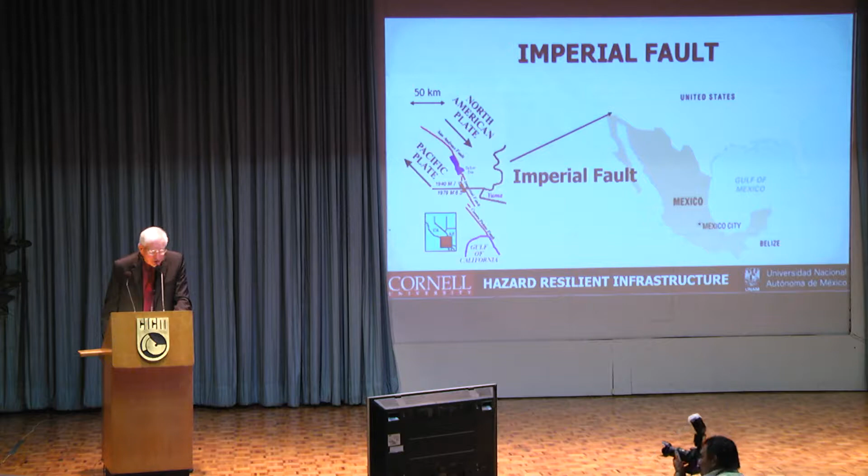Take one particular fault, the Imperial fault. If we look at the border between the United States and Mexico, the Imperial fault crosses that border as a kind of emblem of common cause. There was a 1979 Imperial Valley earthquake which caused damage on both sides of that border.

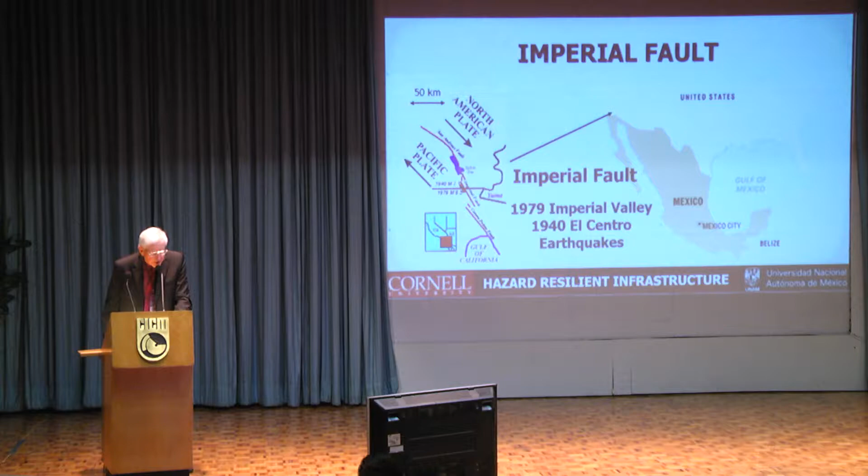Going back to 1940, the El Centro earthquake was another one that caused damage on both sides of the border. In fact, if we trace back year after year, there are a number of earthquakes just on that one fault.

We've had some terrible recent earthquakes in Mexico, and certainly those of us in the United States who also have to deal with earthquakes send our condolences and our affirmation to work with you to make our communities better in the face of earthquakes in the future.

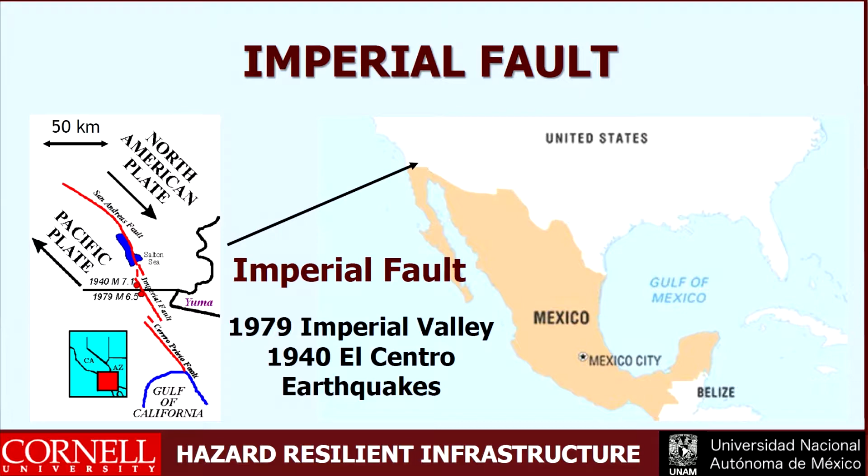One of the missions I'm on during this particular visit is to help coordinate a U.S. and Mexico joint evaluation and inspection and understanding of the effects of the two recent earthquakes: the September 7th earthquake near Chiapas and the 7.1 magnitude earthquake of September 19th.

Hurricanes also have a profound effect on both the United States and Mexico. Most recently, our problems have not been earthquake related, but through the recent hurricanes, Irma, Maria, and Harvey, we've had terrible destruction, loss of life, and problems there.

It harkens me back to the 2005 hurricane season when we had so many named storms that we ran out of the alphabet and had to go to the Greek alphabet to name them. I call that the Greek bailout of our alphabetic system.

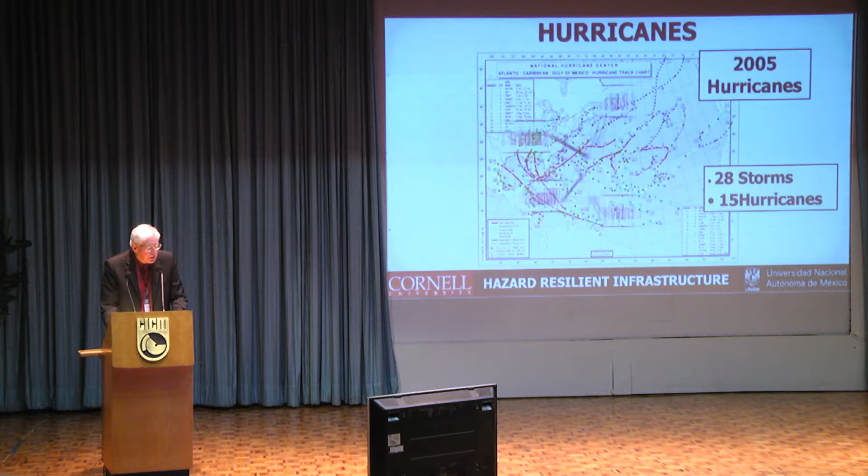Some of the more serious storms of that time were Katrina and Rita, which had a profound influence on New Orleans, the first one being the major effect, but also in Mexico, Hurricane Emily.

I'll tell you a personal story. We were going to take a vacation at a place near Playa del Carmen called Xpu-Ha. Xpu-Ha was destroyed by Hurricane Emily at the beginning of that hurricane season.

Then we decided to take a vacation at Cozumel, and then that was destroyed by Hurricane Wilma at the end of that hurricane season.

There's a tremendous story in the restoration of Cancun and the whole Maya Riviera, which was very effective after Hurricane Wilma. I've always wanted some common dialogue between our Mexican friends and colleagues and the United States friends and colleagues about how both those hurricanes were treated and attended to.

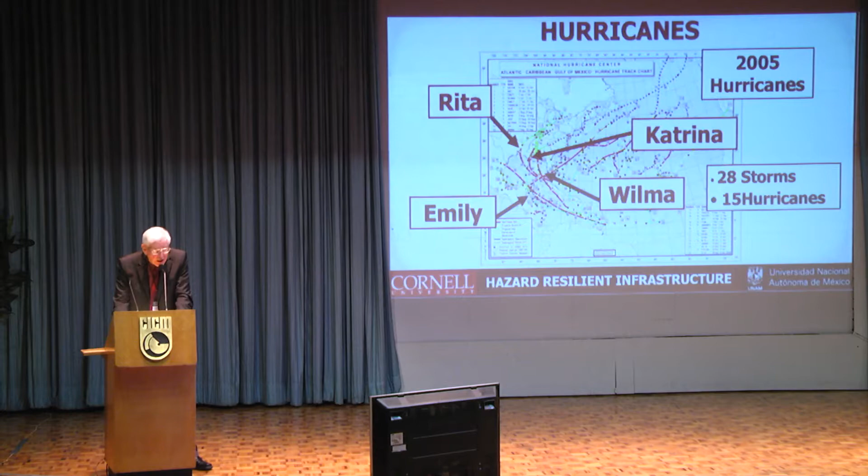Katrina in the United States and Wilma in Mexico, because both of them had profound influences, and of course they were terribly destructive. In fact, with Hurricane Katrina, we typically talk about an evolution in policy.

This created a revolution in policy, where after 9/11 we went from a code or approach adopted by the then Department of Homeland Security for the protection of critical infrastructure to the creation of resilient communities. We're still exploring that transition today.

So before we tell some stories about communities that have had to deal with natural hazards, particularly earthquakes, because that's very topical and important for borders, let's talk about some very important characteristics of infrastructure.

We like to look at infrastructure as being geographically distributed. That is, where do we get the resources and services that support all the buildings and all the activities we have in our communities? We get them from geographically distributed systems such as electric power, gas and liquid fuels, telecommunications, transportation, wastewater, water supply, and flood control and levees.

We understand that these systems are interdependent, so the solution is a collective one. We should not look at one of these systems out of context and individually, but in a united way, coming together to understand how they influence each other and how they can best be managed as a whole.

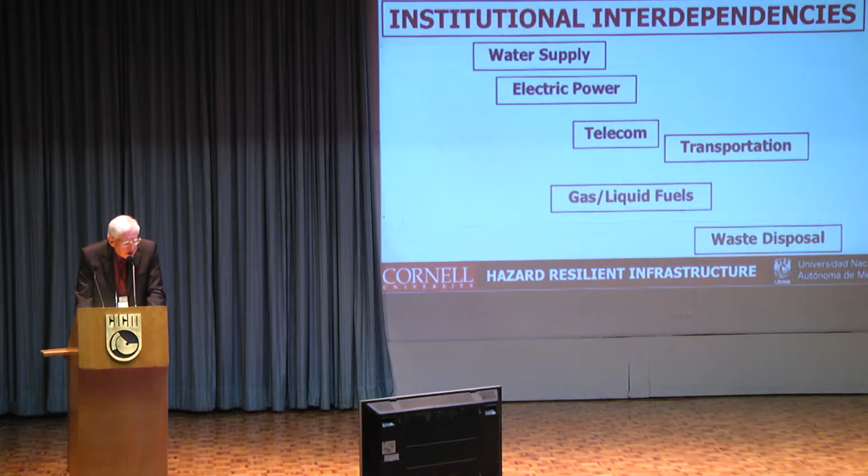If you lose the ability to pump water, you lose the ability to provide water for communities. You lose the ability to provide water for fire protection, and then you lose buildings. This goes on and on with respect to transportation and power and water, and it even affects our financial markets. Perhaps the most important interdependencies that exist in infrastructure.

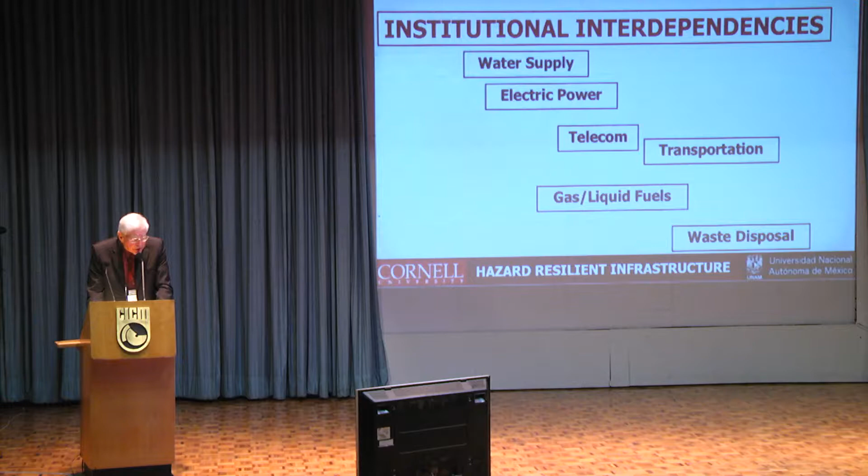If we look at these infrastructure systems I just identified as being shown on this screen, not necessarily connected with each other, but on the same screen, a good analogy for how they actually operate in reality would be Yugoslavia. Our infrastructure is balkanized. Water people do not necessarily talk to electric power people, who do not necessarily converse well with transportation people, who do not necessarily talk to telecommunications people, because they have different business formats. They have different cultures. Some of them are privately funded, some of them are publicly funded.

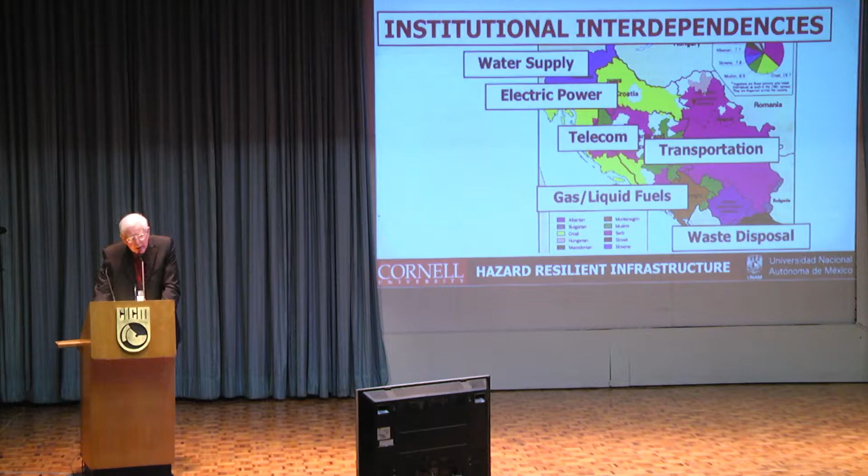And I find that overcoming the institutional constraints is one of the most important aspects of dealing with hazards and dealing with infrastructure in an effective way. So let's tell some stories to see how some communities over many years have been able to deal with some of their hazards.

We'll start with San Francisco, which is sort of a very emblematic city in the United States. People often think of San Francisco as being one of the nicer cities in the world. San Francisco is about 120 square kilometers. Many people think of San Francisco as being composed of earthquake-resistant structures put together by modern engineering and codes and so forth.

So fire following earthquakes is the defining hazard within the earthquake hazards for San Francisco. In fact, San Francisco burned to the ground in 1906, destroying 490 blocks of the city, partially destroying 90% of 32 additional blocks. It is still the greatest single fire loss in United States history.

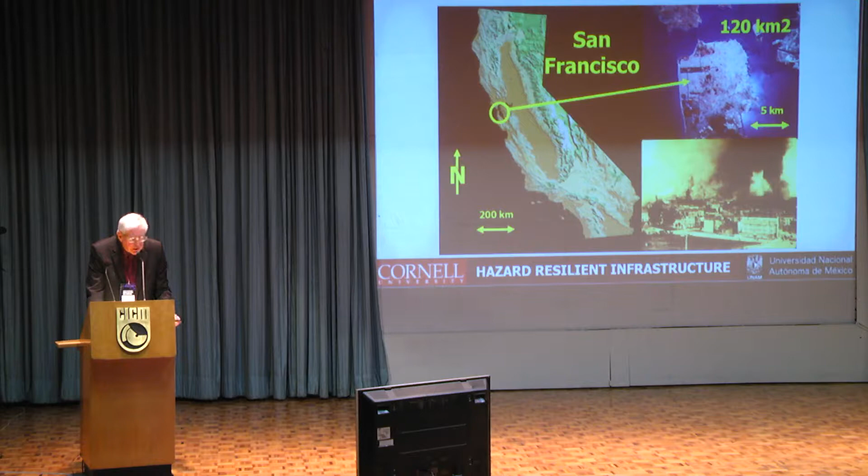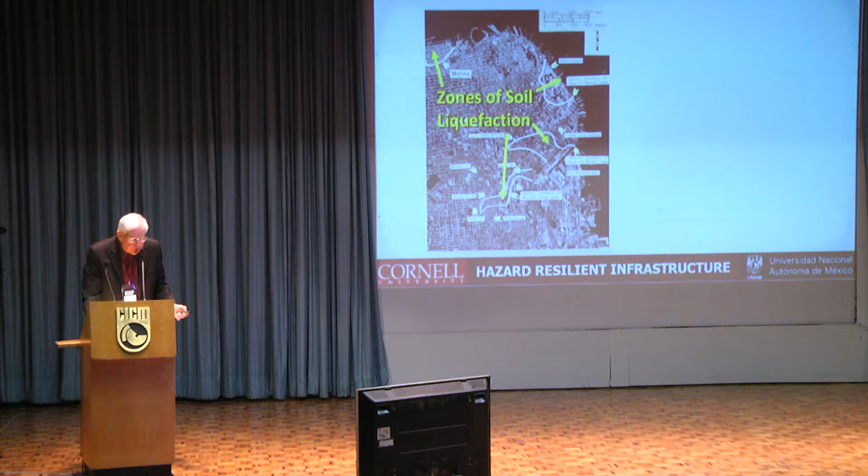So what caused this? It was the ground. What you see on this picture is a map that was put together by the U.S. Geological Survey in a classic 1977 study by Youd and Hoose called Historical Earthquakes in Northern California. They went back and historically identified locations in San Francisco where the ground became unstable in addition to the shaking, and actually liquefied because of soil liquefaction hazards, which of course affect Mexico with your earthquake hazard also. This is a modern rendition of this map where all that information has been transferred into modern geographical information systems.

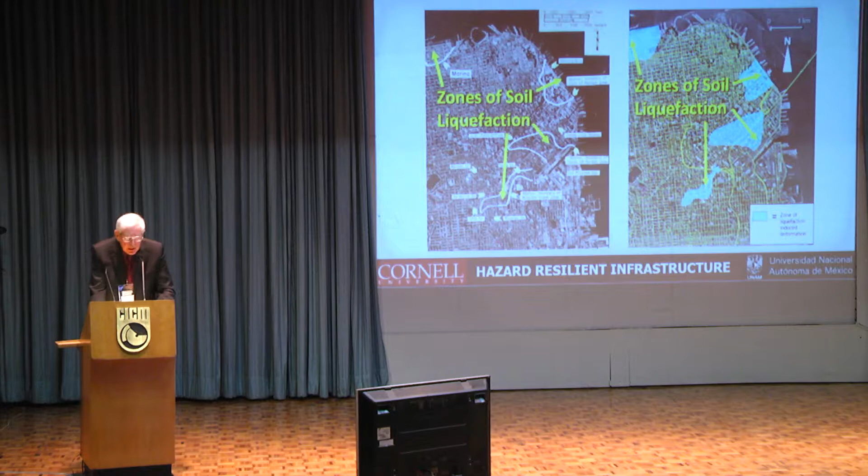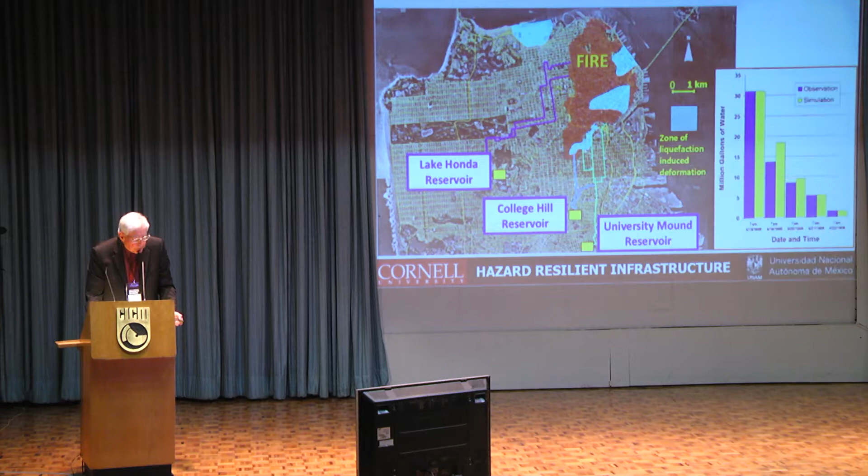This is a picture of those 490-some-odd blocks and scenes of devastation following the earthquake. After that earthquake, the citizens of San Francisco decided to build an auxiliary water supply system, an independent water supply, high pressure, totally independent of the potable water supply system used for drinking and also for fire protection. This became the backbone of fire protection.

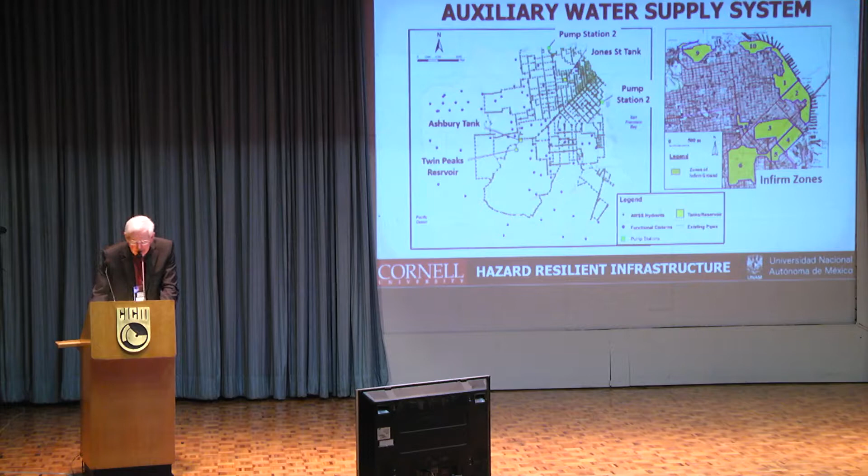The initial stages, about 150 kilometers, were finished in 1913, and over the years it grew to about 250 kilometers by the time of the 1989 Loma Prieta earthquake. As part of the design, they compartmentalized the system so that damage in the yellow areas on this map, where they expected liquefaction to occur, would not cause the system to shut down.

They built the system and waited 83 years until October 17th, 1989, when the Loma Prieta earthquake occurred. Much like this recent 7.1 magnitude earthquake, it was about 120 kilometers south of San Francisco, and ground amplification and site response elevated acceleration and velocity levels there, causing liquefaction in liquefaction areas and some of the more serious destruction experienced at the time.

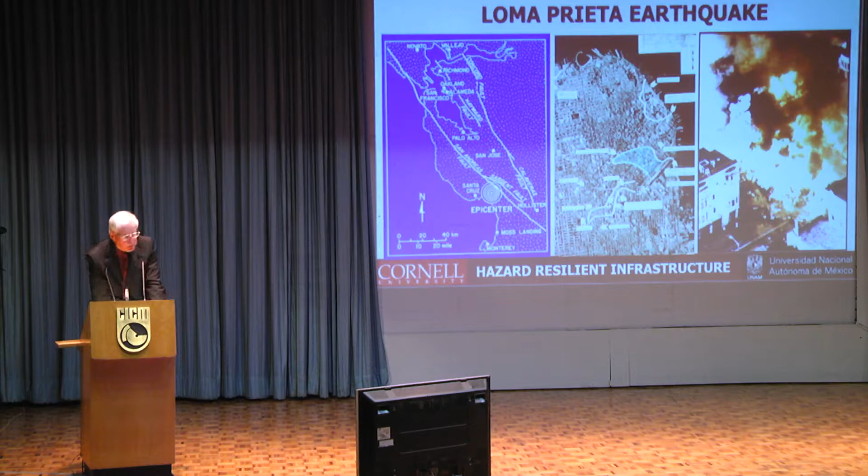Loss of water in this South of Market zone of liquefaction actually shut off water to the entire central business district of San Francisco at the time. So when the fire, which you see on the right, erupted in the Marina, there were no pipelines that could carry water to fight that fire.

Fortunately, simulations had been developed—Cornell played a role in these, along with another company called EQE, and Dr. Charles Scawthorn modeled the fire. Those simulations were run and convinced Dianne Feinstein, who was mayor of San Francisco in 1986, to go for a bond issue.

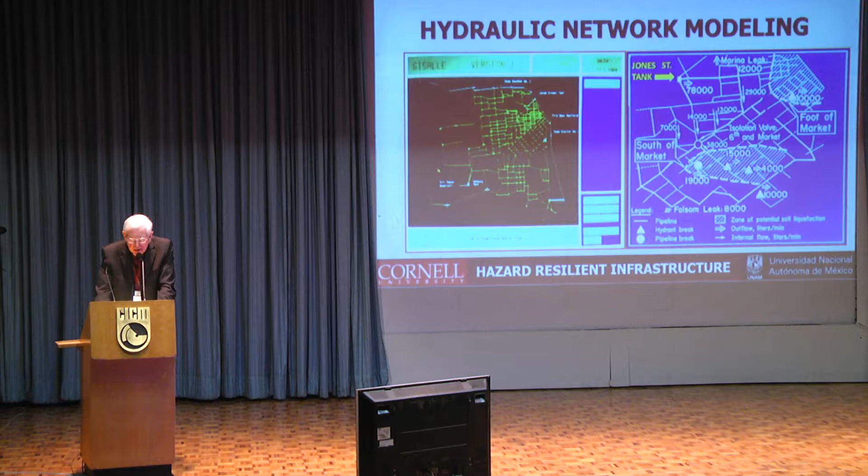That bond issue passed with 89% of the vote, and the auxiliary water supply system was enhanced. As part of that enhancement, they built a portable water supply system that could draft water from San Francisco Bay. So I'm going to move forward and show you what the portable water supply system looked like.

Here's the portable water supply. There were 3 special fire trucks that carried 1.5 kilometers of 125-millimeter diameter hose, above-ground pipelines, and above-ground hydrants, which could be connected with the infinite source of water in San Francisco Bay and used to protect the central business district about 1.5 kilometers inward from the bay at various locations.

When the fire broke out in the Marina, which I'm now showing in this illustration, we were fortunate in that, because San Francisco is so subject to fire, there was not a breeze blowing that night. The fire in the Marina looked like a candle, and that helped prevent it from spreading.

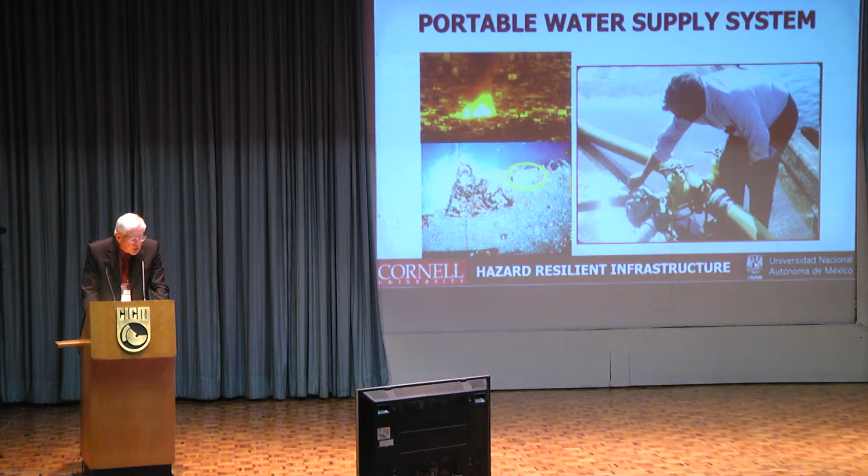These hose tenders showed up. They were commissioned not by our simulations at Cornell, but by the vision of this person, Frank Blackburn, who was deputy fire chief at the time of the earthquake. He had personally undertaken to use the money passed by voters in 1986 to put in a portable water supply system using those hose tenders.

This is a picture of where the fire occurred in the Marina. On the left, you see where the fireboat Phoenix came into the San Francisco Yacht Club, and 3 of those hose tenders came to that location, able to relay water down to where the fire was occurring.

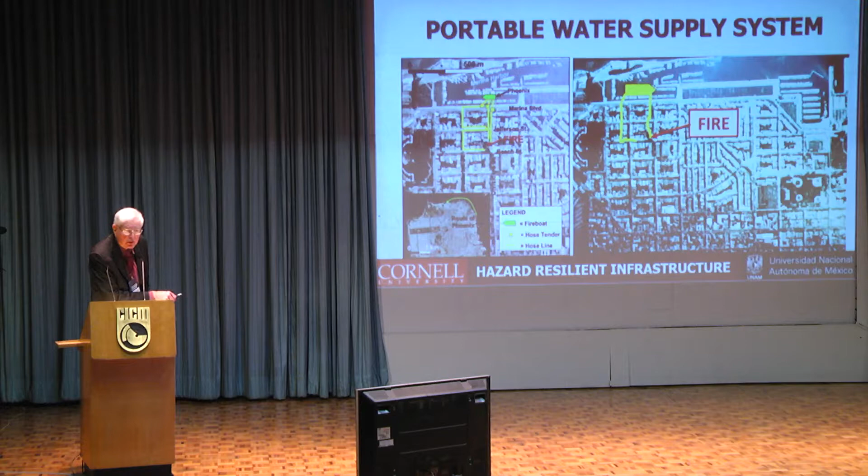That's illustrated over here on the right, getting the water down to where the fire was. They managed to extinguish the fire before it actually jumped Divisadero Street and burned into the rabbit warren of sinuous and twisting roads, where there was no natural fire break in the Marina itself.

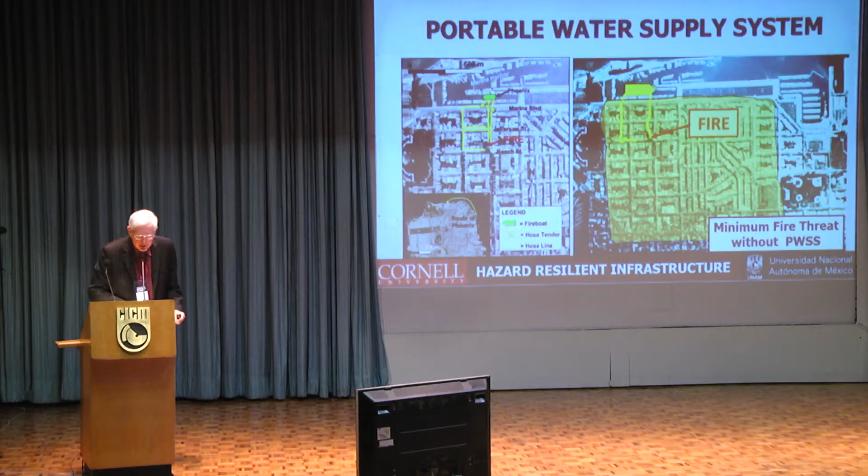Deputy Chief Blackburn said that without this protection, they would have had to set up on Fillmore Street, the next natural fire break, because fire companies never let the fire get behind them. They would have lost this entire part of the Marina, contributing to a great catastrophe.

We actually had experience with the same type of situation several years after 1989, during the World Trade Center disaster. When the World Trade Center complex collapsed, it started to burn, and the collapse broke up all the pipelines feeding those 40,000-person villages in the sky. Both 110-story tower structures fed water to 40,000 people each and contained very large diameter pipelines, which when they collapsed made a great draw on the water at the site.

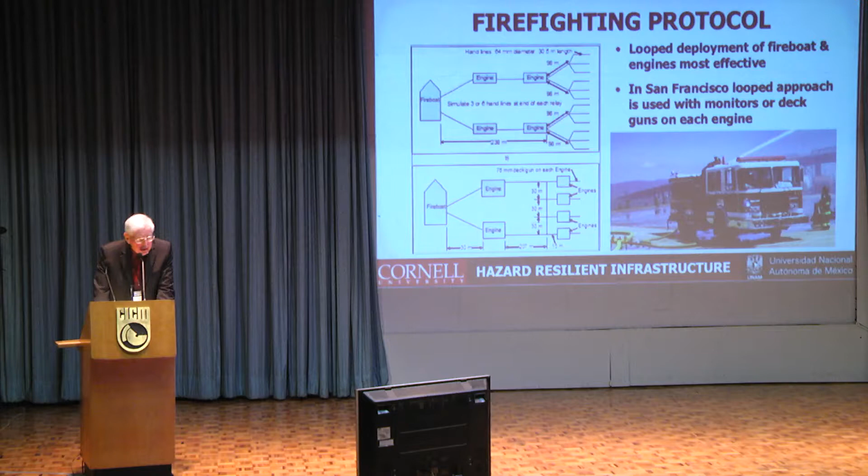So they actually had to take the fireboats that were commissioned in the New York City Fire Department. They were able to supply something like 500 liters per second, augmenting only 300 liters per second which came from what was remaining of the water supply, because the loss of pressure and flow had reduced its pressures very seriously. Both of these events led to an improvement in how people operate and work with fires in various cities.

You would have thought that after making all of these adjustments for water supply in San Francisco, there would have been additional hose tenders built and additional components to the portable water supply system. Actually, during that period, from about 1989 to about 2010, the San Francisco Fire Department became underfunded, didn't have enough funds to support various firehouses, began to take them out of commission, had a civil action suit filed against them for not hiring minorities, and didn't engage as much in their fire protection system.

During that period, however, there was a bond issue passed by the voters of San Francisco for $4.5 billion in a water system improvement program, built over about 10 years, from about 2002 to about 2012-2014, predicated on setting standards for the performance of the system and improving the water infrastructure in San Francisco tremendously.

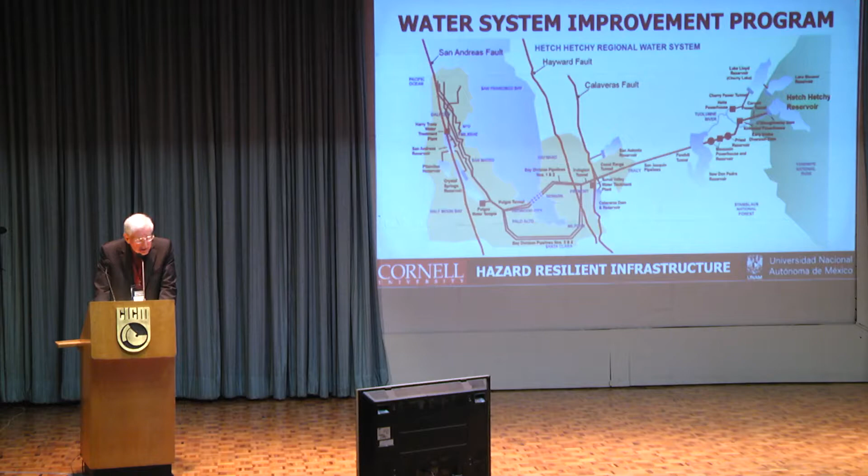During that period, the San Francisco Public Utilities Commission became much more proficient at understanding how to operate their water supply system and make things work better. They eventually took over the auxiliary water supply system in about 2009 from the fire department, and the two organizations worked closely together running it.

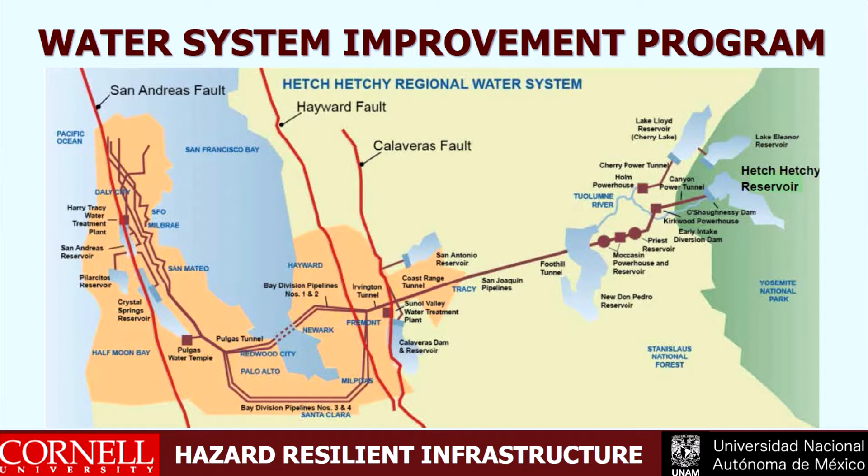I firmly believe that if the San Francisco Public Utilities Commission of 2002, without that experience of building the water system improvement program, had taken over the auxiliary water supply system, it would have been very difficult for them to do that in a meaningful way. But having gained that capability through time, they were able to do it.

They were able to harness the force of the city and the politics of the area to pass an earthquake safety and emergency response bond in 2010, followed by another in 2014, which collectively provided $800 million to improve the infrastructure for the water supply in San Francisco through enhancements in the auxiliary water supply system and other associated structures.

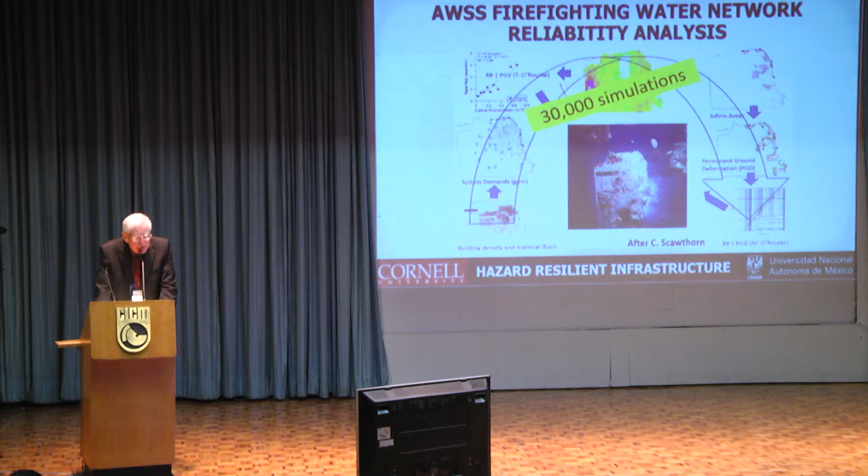As part of that program, there was an augmentation of that early hydraulic network analysis to include 30,000 simulations of different fire scenarios and provisions of water, to act as the backbone for planning the hierarchy of infrastructure projects that would go into improving the water supply in San Francisco.

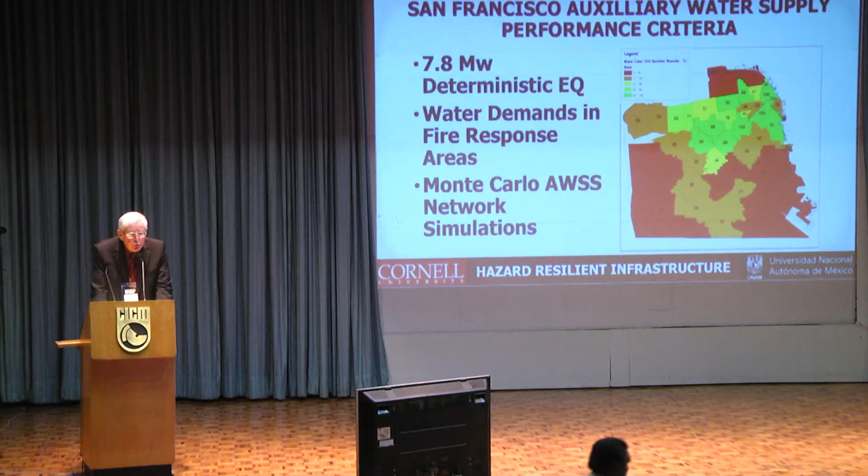This improvement was based on information for performance criteria from the fire department. The city of San Francisco is divided into 37 different fire response areas, each centered on one of the fire stations. That became the process for simulation, where the deterministic demands in terms of fire spread for a 7.8 magnitude earthquake were used to generate a probabilistic forecast of fire demands.

A hydraulic network model that could account for instabilities in the hydraulic network, due to all sorts of damage from liquefaction, was used to determine the probability of actually getting water there to meet the fire demand expected from this deterministic earthquake.

What you see was the first pass done with the existing water supply system, so you can see where the current auxiliary water supply system is. There was a good green area here, about 80% probability of being able to meet the actual fire demands, but a terrible condition up here in the North Shore and other locations.

So the engineers went to the San Francisco Board of Supervisors and came up with a hierarchical program for improving the water supply that turned all this area where the financial district is, and all the business activities that make San Francisco economically viable, into green areas.

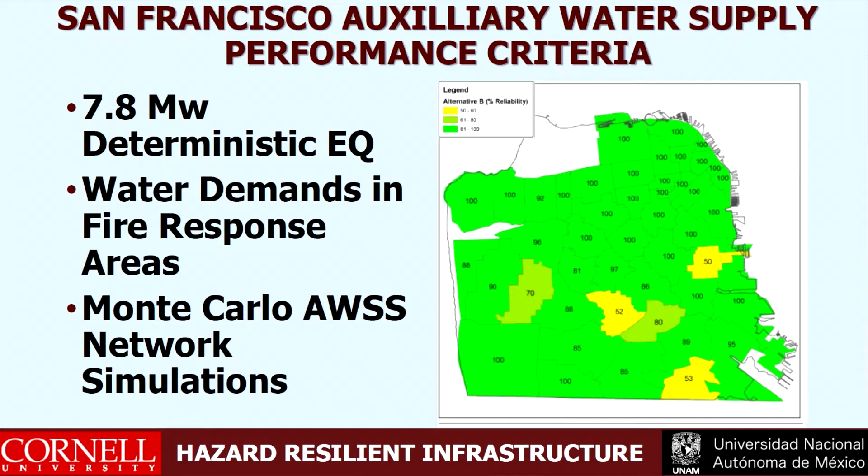With the 2014 bond issue already passed, there are projects underway to change and improve the conditions in San Francisco. Now, I came with a very flexible talk, and I knew I was going to run out of time, and I think I'm just about out of time right now. So I'll stop here.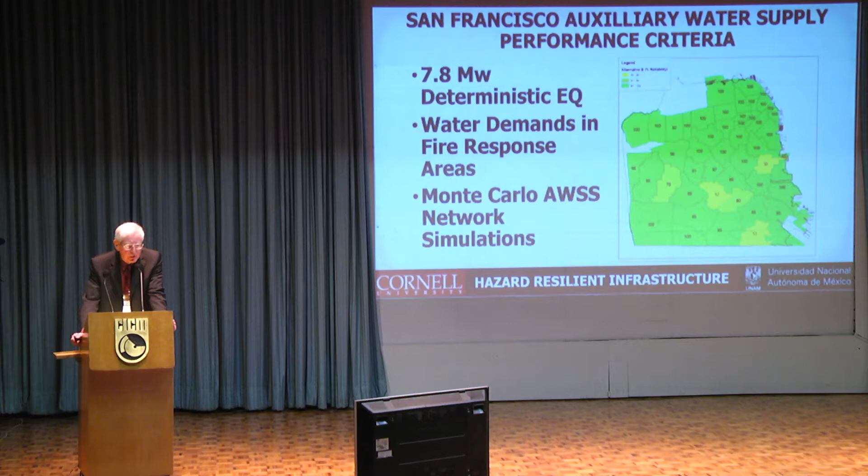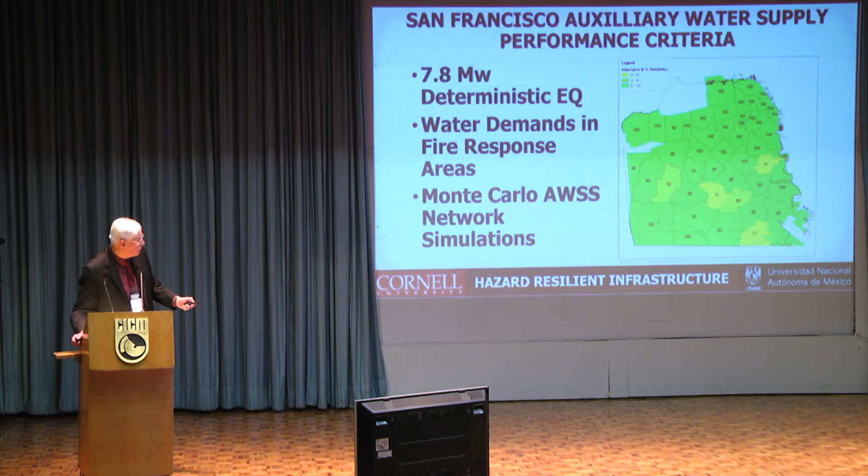I actually have a part of this about Los Angeles also, and I would like to indicate to you that there is a program in Los Angeles. Let me go ahead quickly on some of the slides. I'm going to go through some of these rather quickly because I really want to concentrate on one really important set of slides here - that is Los Angeles resilience.

Los Angeles has a mayor. The mayor's name is Eric Garcetti. I look at Eric Garcetti as the replacement for Michael Bloomberg. Michael Bloomberg in New York City was the great infrastructure leader and mayor of our country. It takes leadership to build infrastructure. It takes leadership to build hazard-resilient infrastructure. And Bloomberg did a fabulous job in New York City. He served 3 terms, 1 extra term, by extraordinary vote of the city council to allow him to break a restraint on being able to run more than 2 times in a row. He then retired.

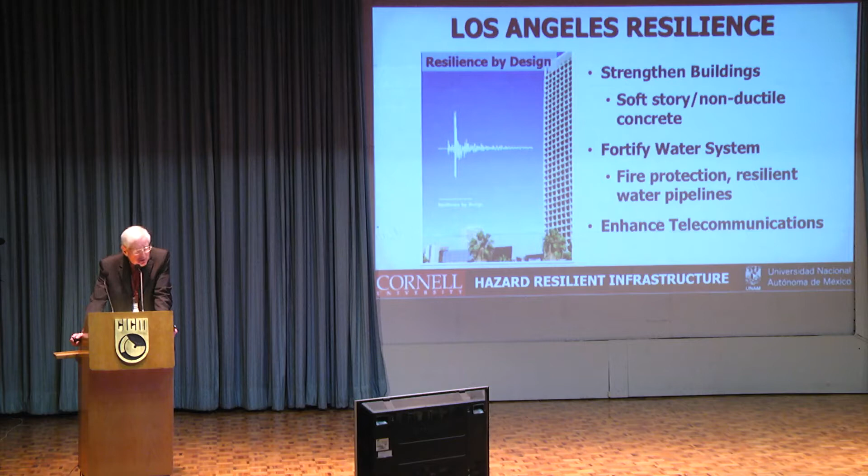Now the infrastructure leadership position in the United States has gone to Los Angeles because Garcetti is a superb leader. He has put together, with the help of a number of geoscientists and engineers, a Los Angeles resilience plan that strengthens buildings, particularly soft story, non-ductile concrete - and we all know how problematic those types of structures are because that's shared in both countries - to fortify the water system for fire protection, resilient water pipelines, and to enhance telecommunications. You can go to the website and type in Los Angeles resilience or resilience by design and see what the plan of Los Angeles is.

One of the issues that needs to be treated in Los Angeles, and in fact all of Southern California, is the fact that the San Andreas Fault cuts off every amount of external water supply that enters into Southern California - 85% of the water that provides water for a population of 22 million people. By the way, many economists say that just Southern California is the 11th largest economy in the world. A 7.8 to 8 magnitude earthquake on the San Andreas Fault can cut off the California aqueduct, the huge aqueduct that carries water from northern to southern California, the Los Angeles aqueducts, which are operated by the Los Angeles Department of Water and Power, and the Colorado River Aqueduct, which is operated by the Metropolitan Water District.

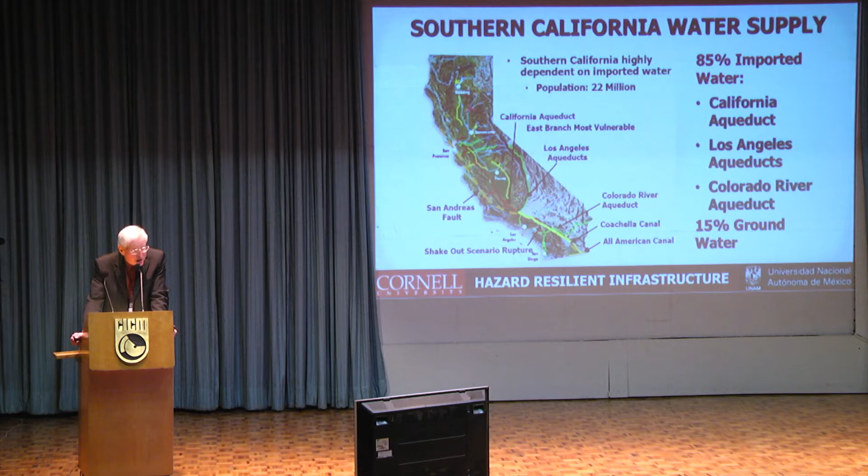15% groundwater isn't going to do it, and even the reservoir supplies that MWD and LADWP have created in those systems is not going to do it either. This is America's Fukushima. If there was an earthquake that would cause a fault rupture here, the best of our abilities to predict the impact of that earthquake would be that it would take between 12 and 18 months to restore the water to the 11th largest economy in the world. That would really have an impact on the United States and, unfortunately, on most other people because of our close ties and strong economic bonds that hold us together.

So how do you solve this problem? You have the California Aqueduct, operated by the California Department of Water Resources; the Los Angeles Aqueducts, operated by the Los Angeles Department of Water and Power; and the Colorado Aqueduct, operated by the Metropolitan Water District. These are 3 regional entities. Think about it: there are 6 permutations for their getting together and agreeing on things, and only one of them works. They all have to agree to solve the problem together.

So that means we have, just to start with, about a 16% chance of getting this to work. And I guarantee you there are institutional restrictions and constraints that further diminish the possibility of these people working together. And this is just water. If we brought electricity or transportation into this, it gets all that much more difficult.

That's why I say the institutional constraints are probably our most important challenge. We have the technology, and more importantly, lately, we have the communities that want this done. We have the political will that's beginning to arise and actually require these people to get together. And they did. Historically, these 3 agencies met about 18 months ago and formed a united front, with constant meetings, engineering, and updates to tackle this issue of the water crossing the San Andreas Fault.

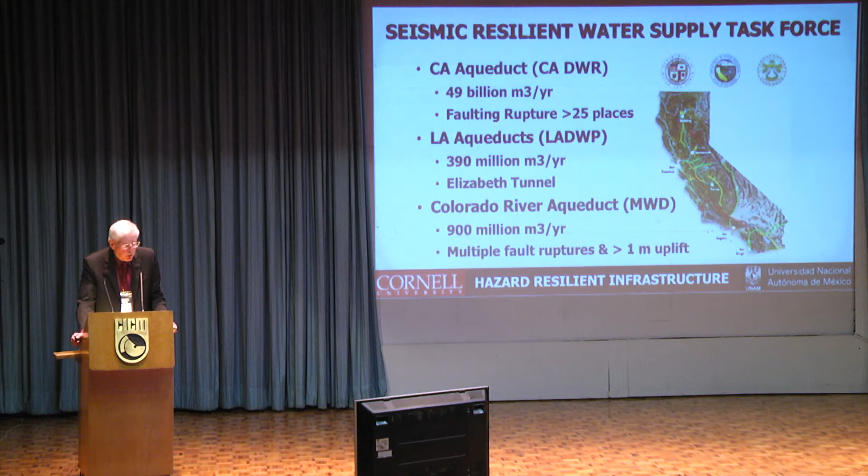It's only about 3 meters wide, and during the Great Shakeout, which was a simulation of an earthquake that occurred in 2008 with about 5.4 million people participating in this emergency response drill, the actual physical model for the rupture of the San Andreas Fault at this location was about 3.3 meters. That totally cuts off the water supply.

What is being done, of course, is undertaking—and this is an expensive proposition—how to build a bypass tunnel. But in the interim, in the meantime, you can actually improve the ability of this tunnel to supply water for lesser magnitude earthquakes. So if we close this tunnel at 3.3 meters at a 7.8 or an 8 magnitude earthquake...

We also may sustain a 7 magnitude earthquake, which is only going to get it to move maybe 2 to 2.5 meters. There are ways in which people have prognosticated what this movement is related to the hazard and the probability of this hazard. So at that point you're going to get collapse in the tunnel. How can you get some water through it?

We're now using high-density polyethylene pipes. We've known from testing that these are the most highly ductile types of pipelines that exist. And furthermore, you can hook them to pumps so that they can pump even more water through.

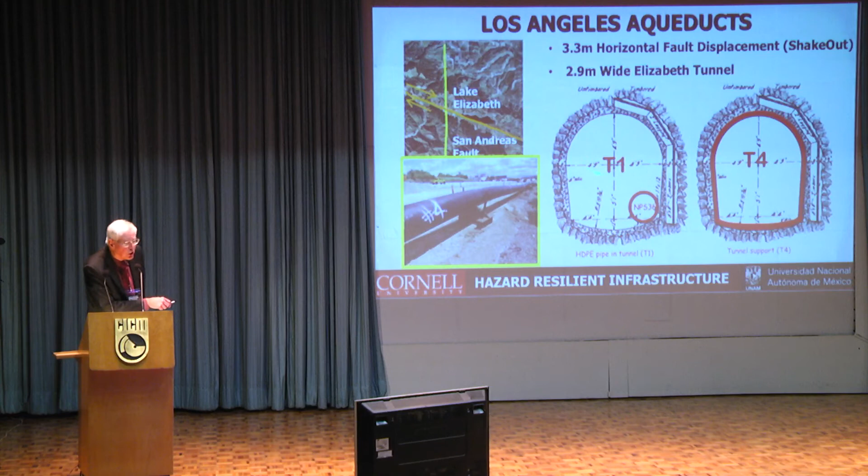The current design concepts, now moving into design, is to put 1 or 2 of these pipelines in the tunnel so that if there's collapse, if there's fault rupture that doesn't go more than about 3 meters—because it doesn't occur at a single plane, it occurs over some distance, even in rock...

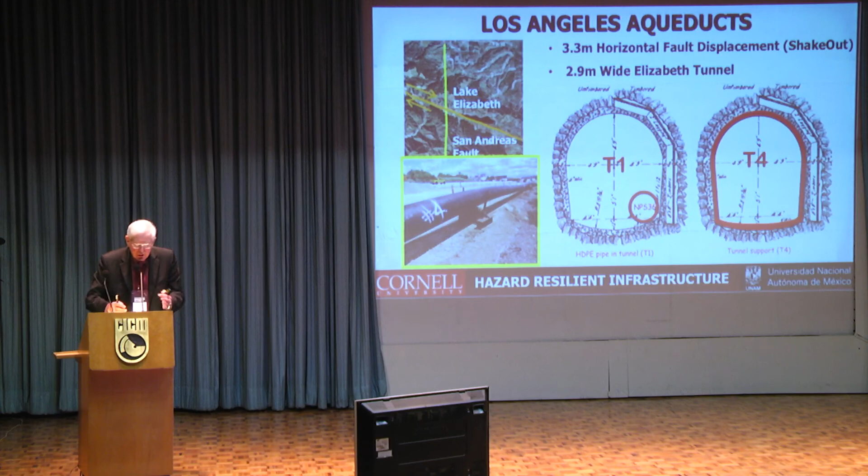You can still get water through these, and furthermore there'll be a construction of steel sets, steel supports, that will actually get the tunnel to perform ductily, as well as the pipeline protecting the water going through the pipeline system. So that is an example of resilience.

And San Francisco is an example of resilience. So what do we learn? Well, in San Francisco's case and the Los Angeles case, we learned that infrastructure is a story. Moreover, it's a saga—a series of stories that are told and retold, lessons that are learned and relearned. And what we learn is it takes time.

My own personal perspective is that dealing with infrastructure is like a football match, both soccer or American football, where it's all about field position and relationships. We wait for natural hazards to occur. And without the right field position and without the right relationships, we can't take advantage of the moment to be ready, and we can't take advantage of the moment to improve, because many times it takes a natural hazard and a disaster to stir us, to motivate us to do something.

So the preparations in the interim are everything. Also, dealing with the institutional constraints. And I do believe—we see it in San Francisco, we see it in Los Angeles—that the political will is changing. People expect an infrastructure system that works, and they deserve it. Thanks very much.